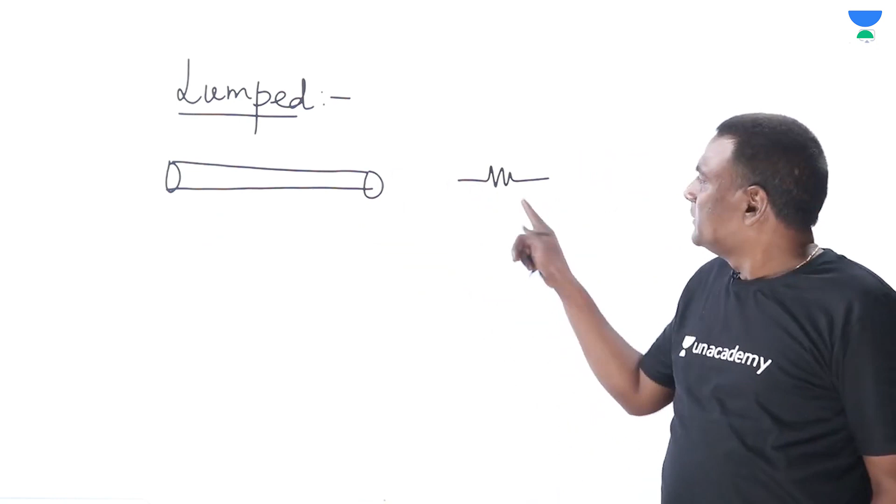That's it. Okay, meaning that maybe if I have one wire here, of 1 meter or whatever it may be, if you convert that wire into resistance, if you model the resistance of the physically existing system into a mathematical model, this length is 1 meter. What is this length? Nothing. It's a model. That's it. This is the lumped parameter model. And when to go to the distributed parameter model also we have to see.

Right. Now, the point here is, what is lumped? When should we go to lumped? Because if the physically existing system gives 2 amperes for 10 volts, my mathematical model also, after using our tools of network theory, should give almost 2 amperes for 10 volts. Right? So, for that purpose, the lumped parameter model. What is the lumped parameter model? Now, let us see here.

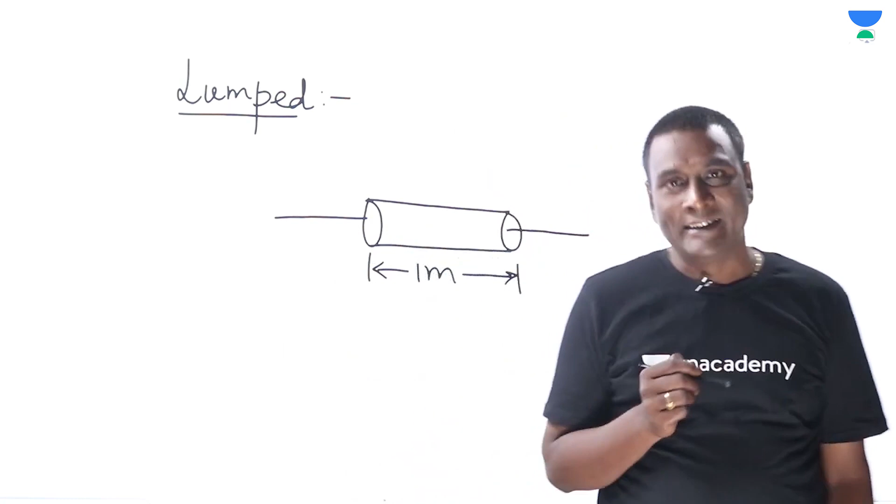If I have one system, or maybe only a wire, and this wire length is 1 meter. Let me assume, you will come to know gradually, because this can be directly connected with the power system. Long line analysis: why in long line analysis do we have to go to the distributed parameter model? Why in short and medium lines in power systems need we not go to that level? You will understand now.

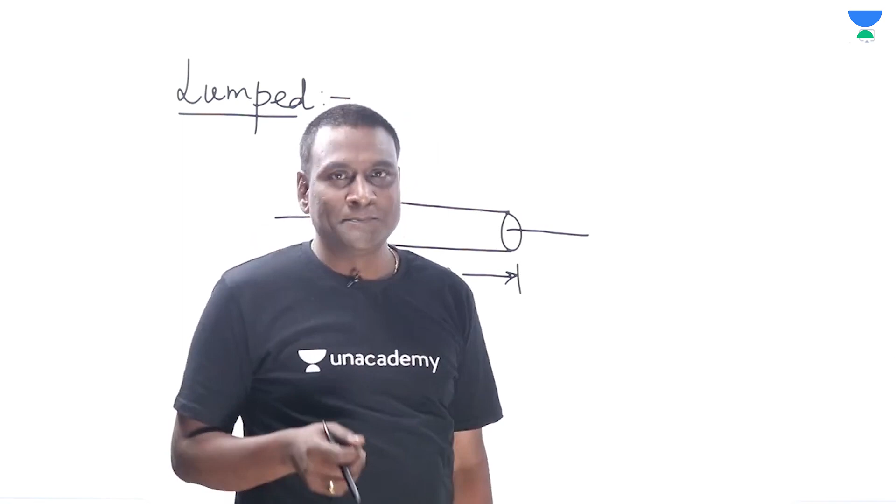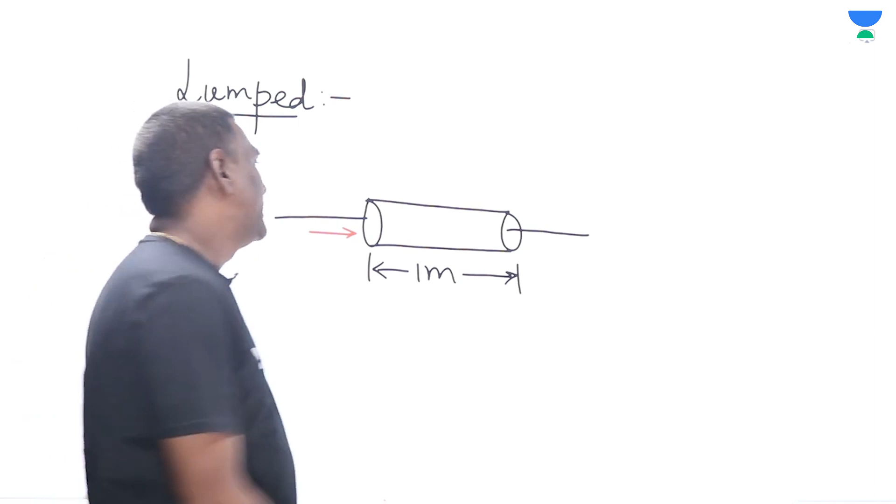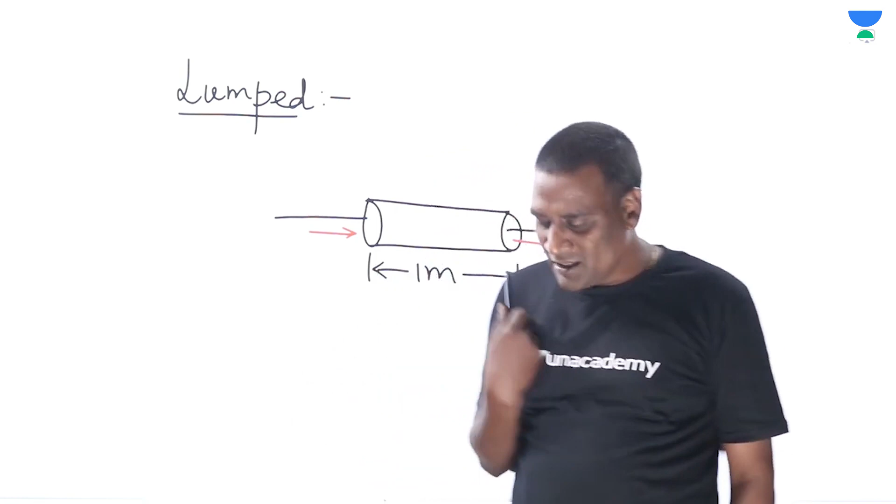Now, if I hit here with some electromagnetic wave, it will come out from here after some time delay. It should be there because, as per the theory of relativity, nothing can go beyond light velocity. Our electromagnetic wave velocity is also light velocity only. Actually, don't focus on the time delay, but rather focus on the information. You will get to know soon. Now, what is the velocity of an electromagnetic wave? This is 3 into 10 to the power of 8 meters per second.

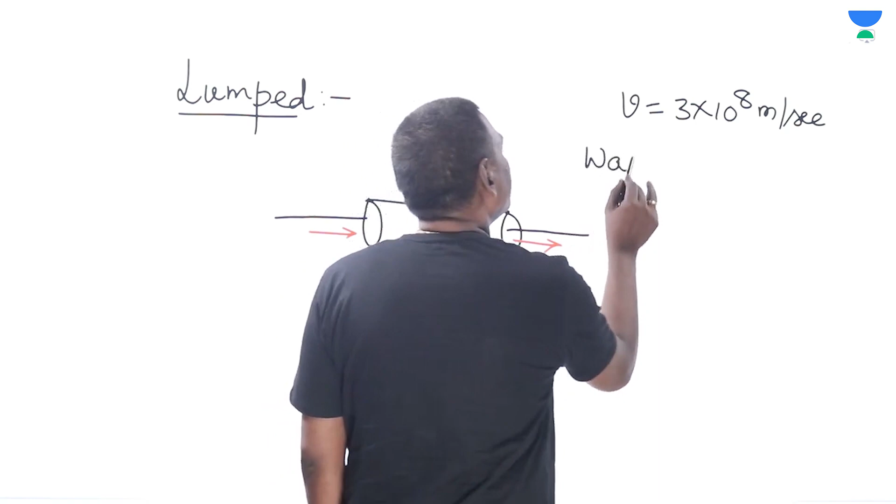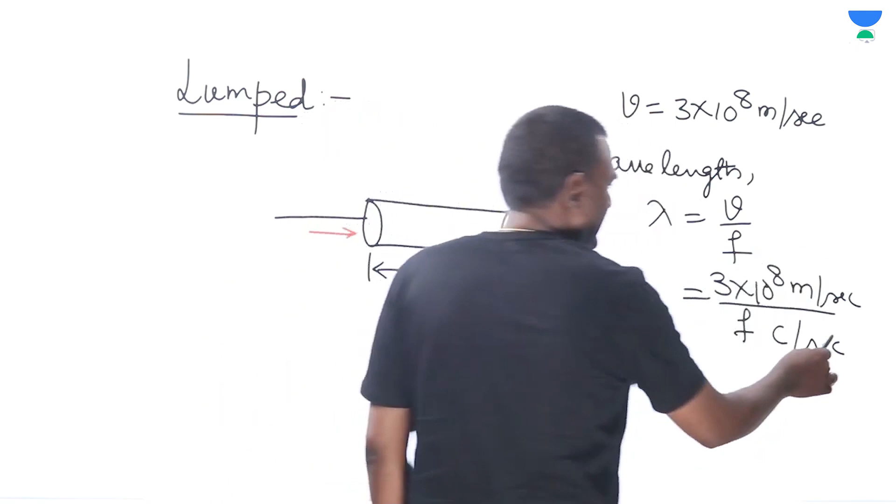Now, let us understand what is wavelength lambda. Wavelength lambda equals V by F. This V is not voltage; this is the velocity of the electromagnetic wave, in meters per second, divided by frequency, in hertz or cycles per second. What are we going to get? Meters per cycle. Try to understand, because we can make many things very easy by trusting dimensions.

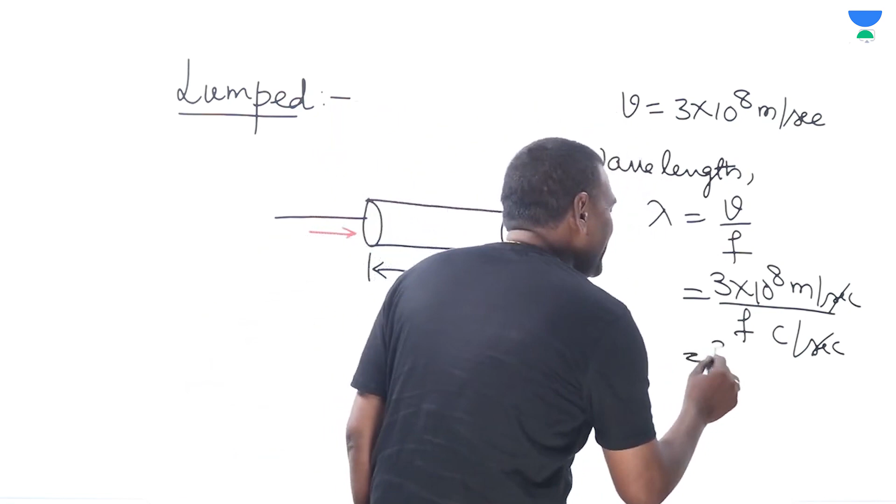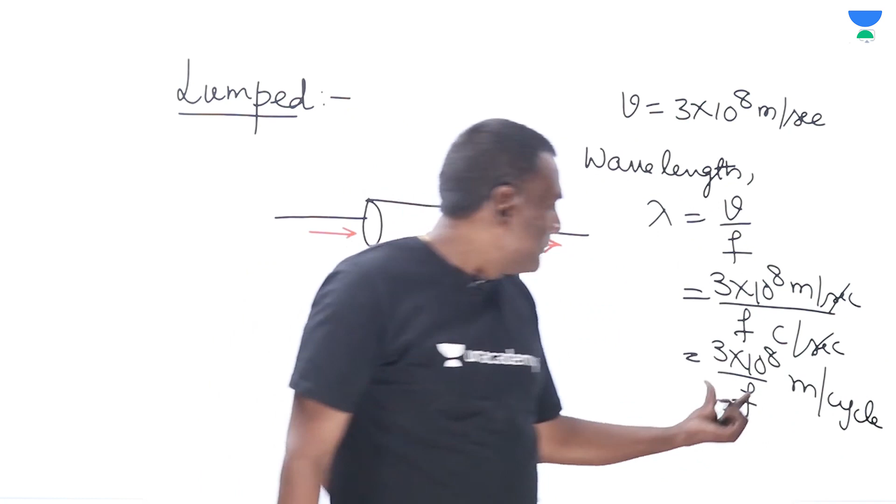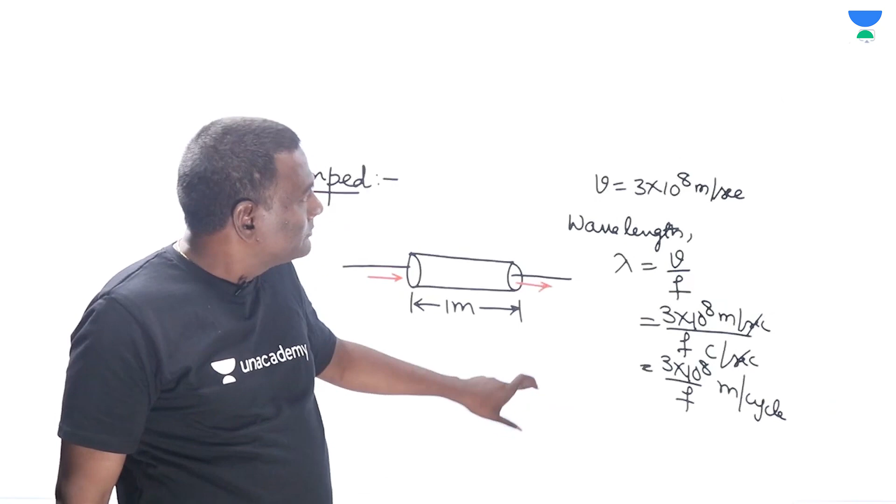So this is going to be 3 into 10 to the power of 8 divided by frequency, so many meters per cycle. Meaning that my wave will travel those many meters per cycle. Now, how many meters per cycle will be decided by frequency. Now, let us think of frequency. Let us consider 3 different cases.

Let me consider the first case: lambda equals 3 into 10 to the power of 8 divided by 3 hertz. Normally I take the same numbers because it is easy to visualize. With a frequency of 3 hertz, 3 cycles per second, this is going to be 1 into 10 to the power of 8 meters per cycle, or 10 to the power of 5 kilometers, 1 lakh kilometers per cycle.

So, if the same electromagnetic wave hits here, in one cycle, you will get the information gradually, our electromagnetic wave will travel 1 lakh kilometers. Now, let us take the second case.

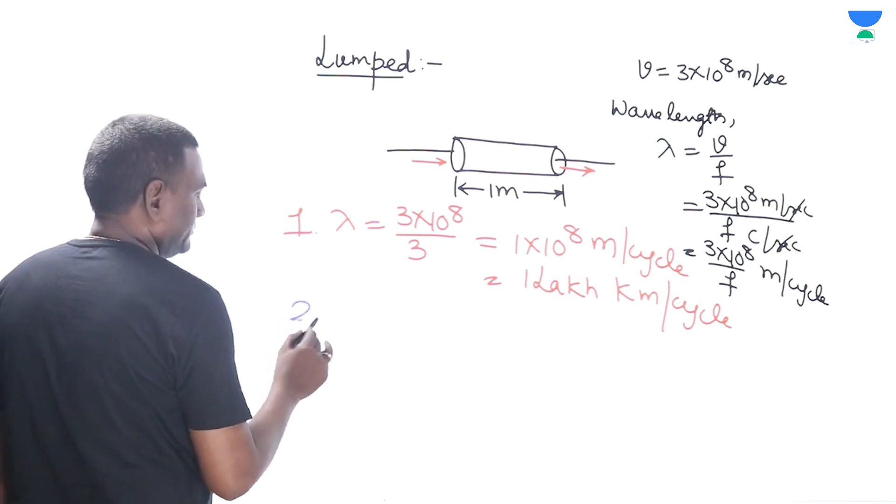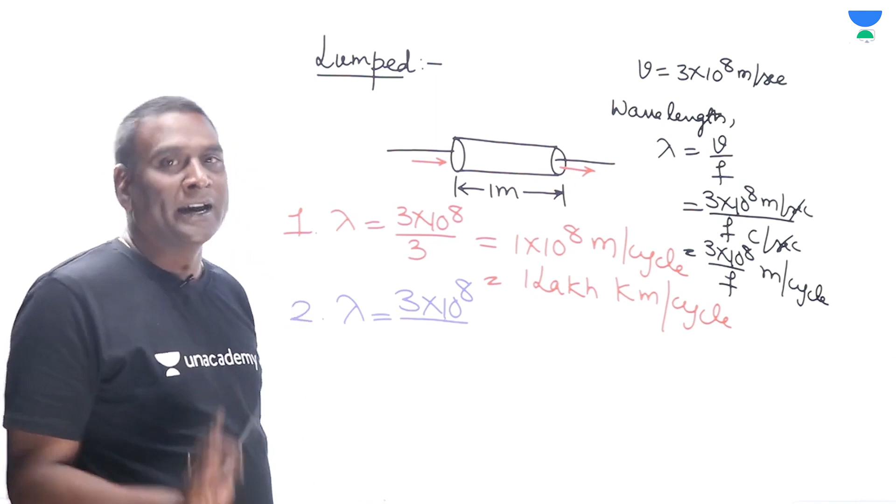Second case, lambda equal to 3 into 10 to the power of 8 divided by... Let us consider frequency is increased to 300 megahertz. So it is going to be 300 megahertz. Second case, then how much would it be? It is going to be 1 meter per cycle.

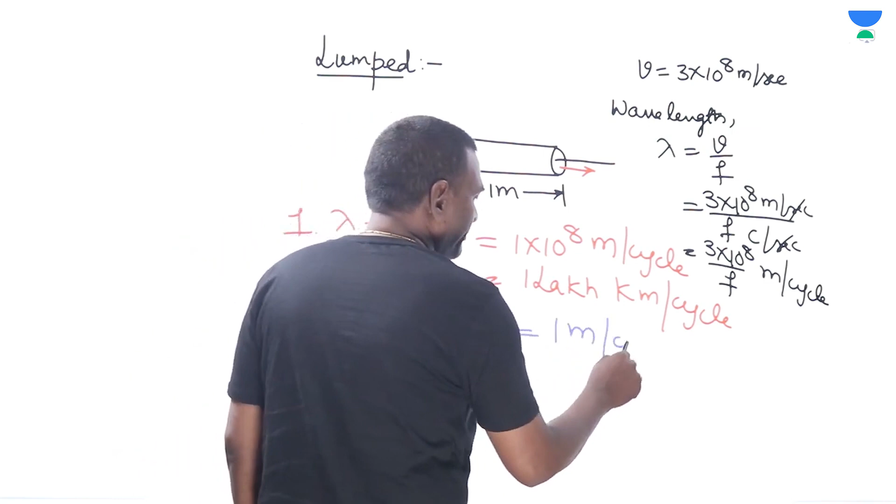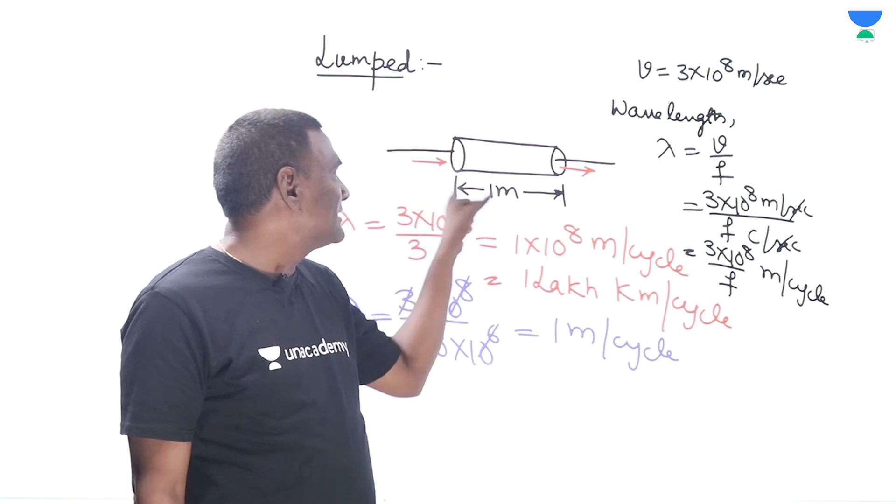Focus here. So, in the first case, if your operating frequency is 3 hertz, then before losing one cycle of information, my wave will travel 1 lakh kilometer. And in the second case, in order for my wave to travel from here to here, it will consume one cycle, because this is 1 meter per cycle. Okay. Now, let us think of another system.

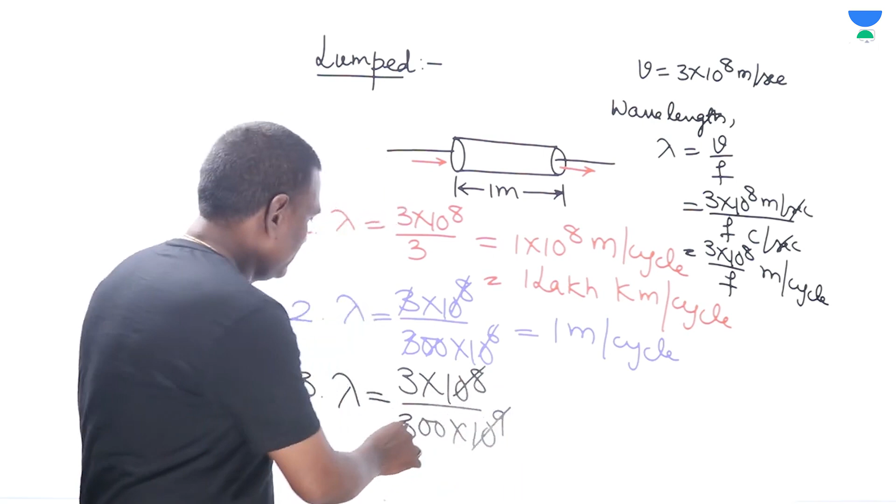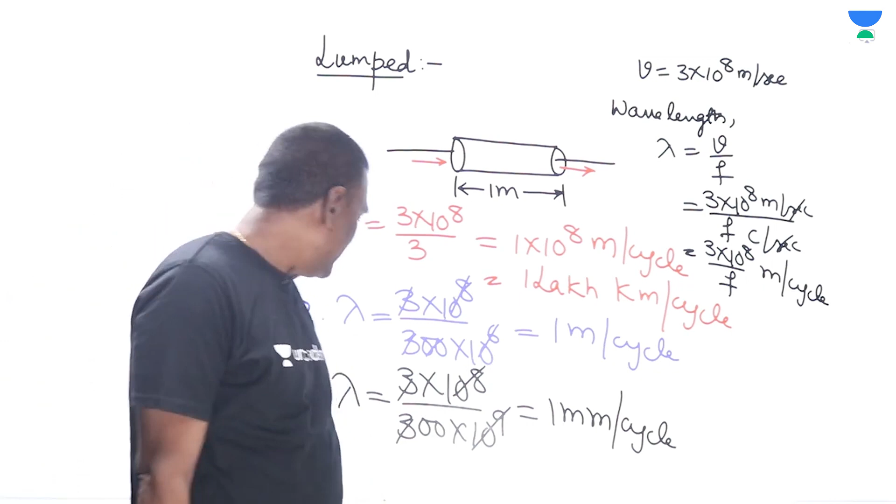Lambda equal to 3 into 10 to the power of 8 divided by maybe 300 gigahertz. Meaning that it is going to be 1 by 1000, 1 millimeter per cycle. Now you will get the clarity. See here, my electromagnetic wave velocity is constant, 3 into 10 to the power of 8, but after starting my electromagnetic wave here, before it reaches here, how many cycles of information are we going to lose? Try to focus there. You will get the idea.

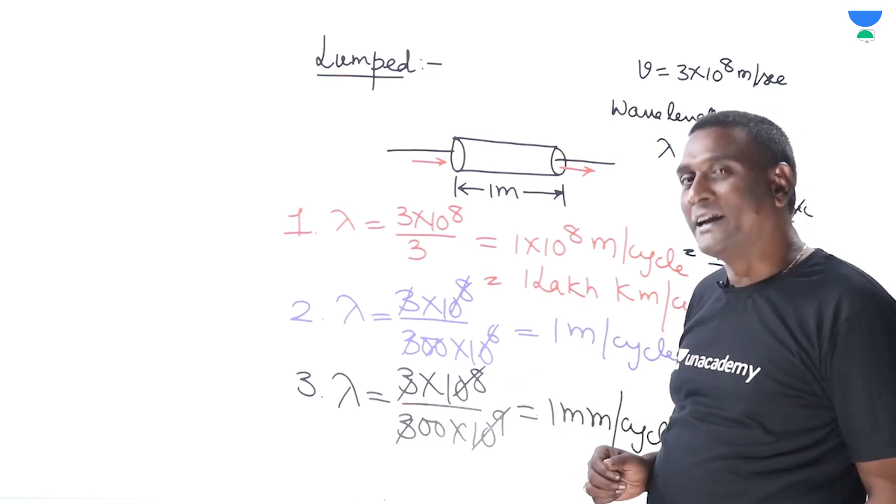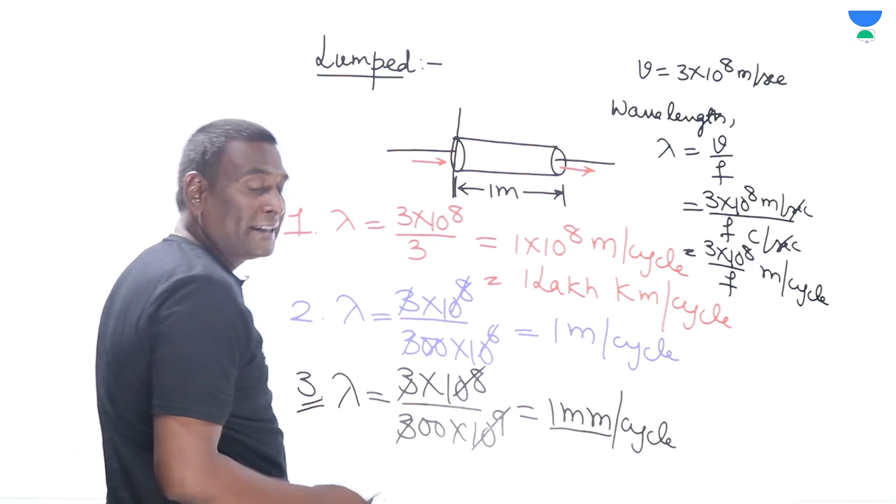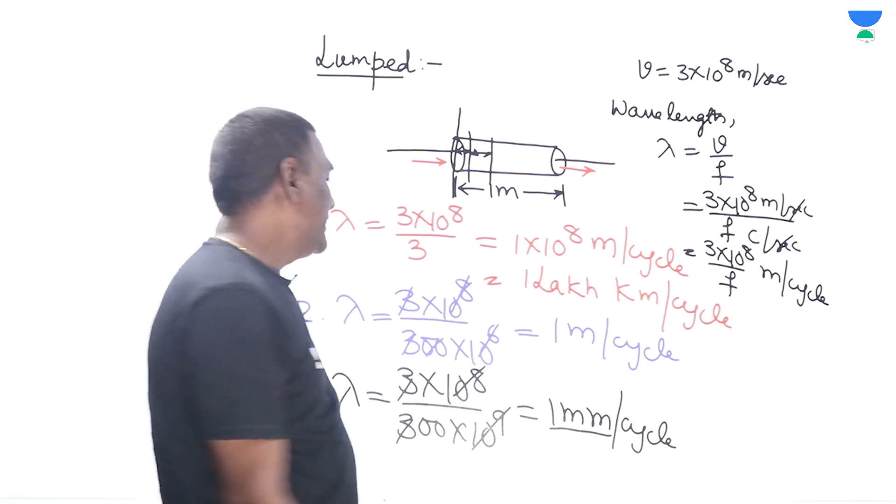Now see here. In this case, 1 millimeter per cycle, meaning that if I hit my electromagnetic wave here, in order to reach 1 millimeter more, it will consume one cycle. After 1 millimeter, it will consume one cycle. Such that in order to get my electromagnetic wave from here to here, 1 meter, it will take 1000 cycles.

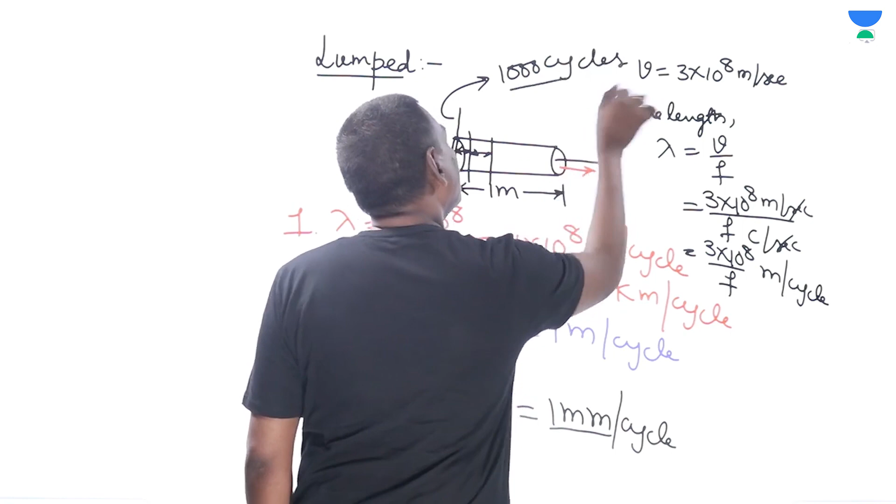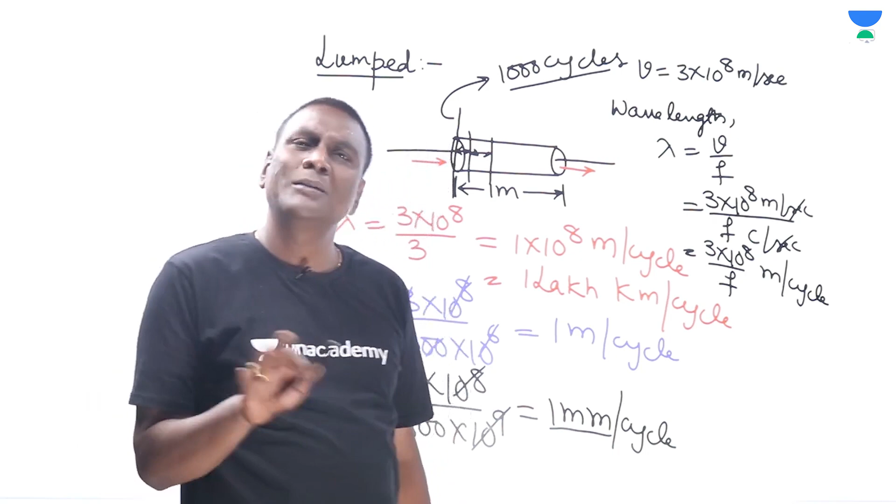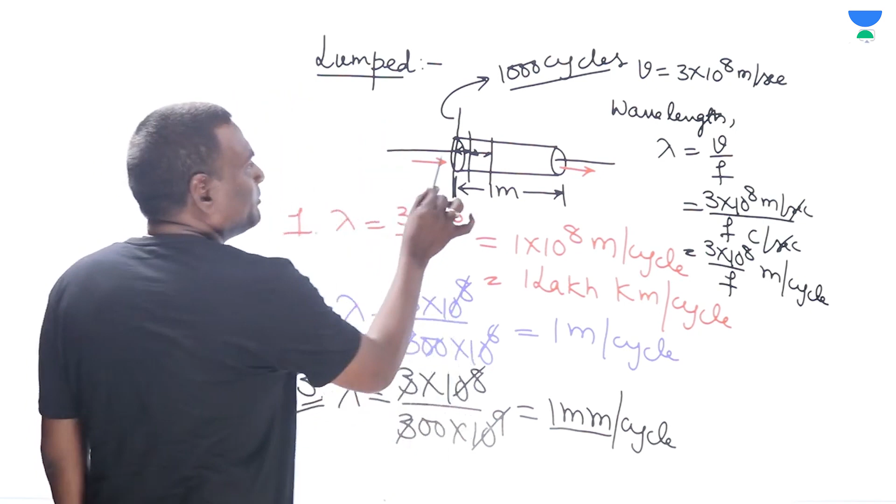Try to understand this properly, because basics are very much important. We have to understand the proper way. At the start, we will learn slowly, not a problem. But once basics are built, our perception levels will increase exponentially. Anyway, for this wave to start from here and to reach here, it will take 1000 cycles.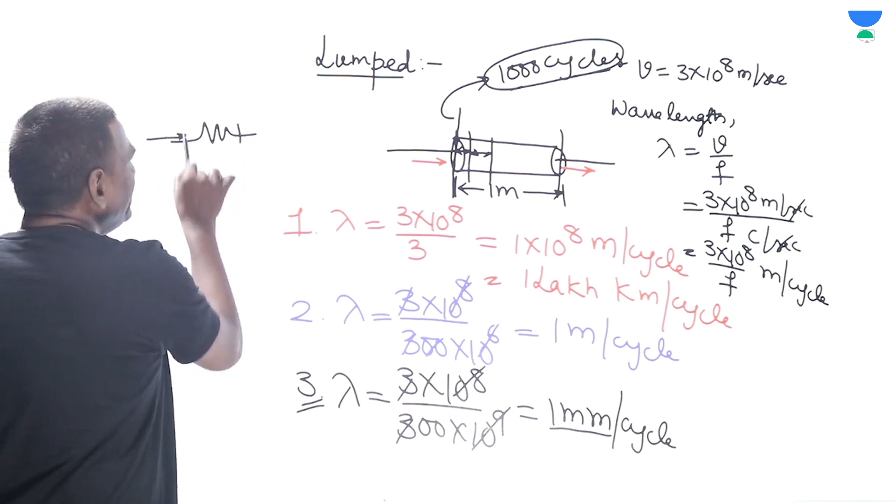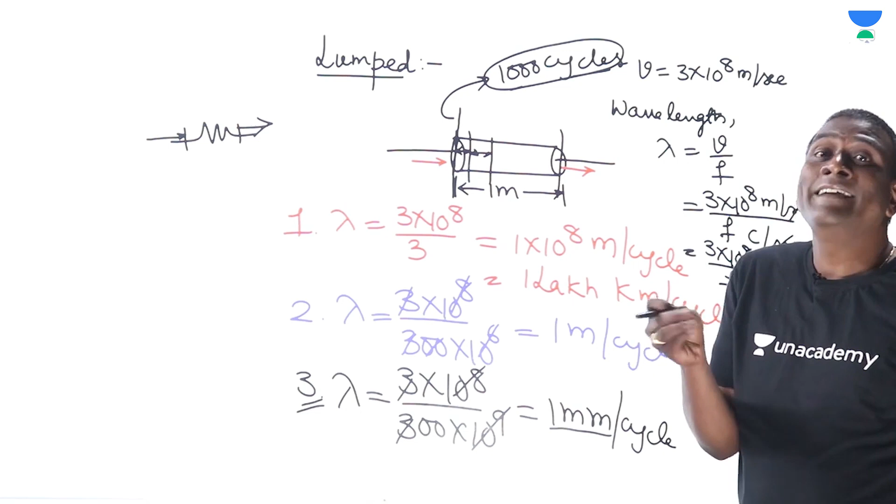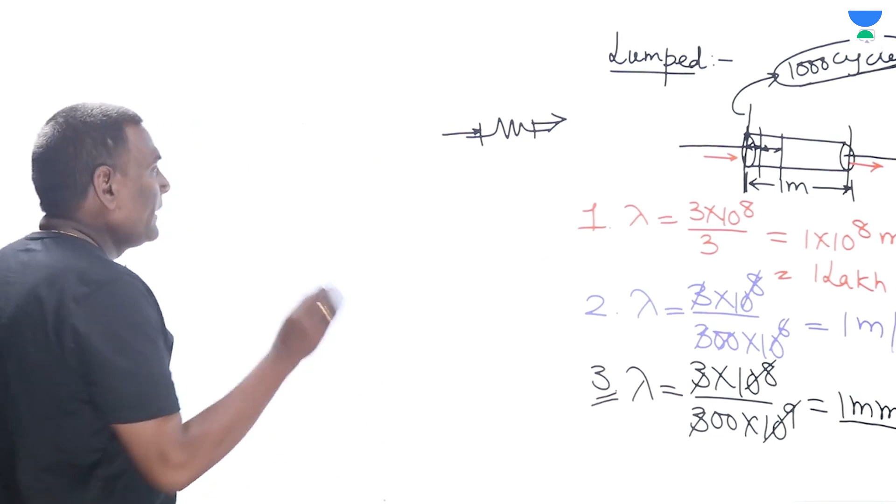Now if I convert this into simple network theory. In network theory, once the electromagnetic wave enters here, it immediately goes here; that is the assumption there. But if you use network theory for this case, what is going to happen? You are going to miss 1000 cycles of information. Okay, forget about it. Let me give you a practical example.

In networks, we don't get the velocity of the electromagnetic wave and all, but in EM theory, traveling waves will be there. In power systems, long lines, traveling waves will be there. But in networks, or short or medium lines of power systems, we don't get velocity or traveling wave concepts. Why? I'll tell you a practical example.

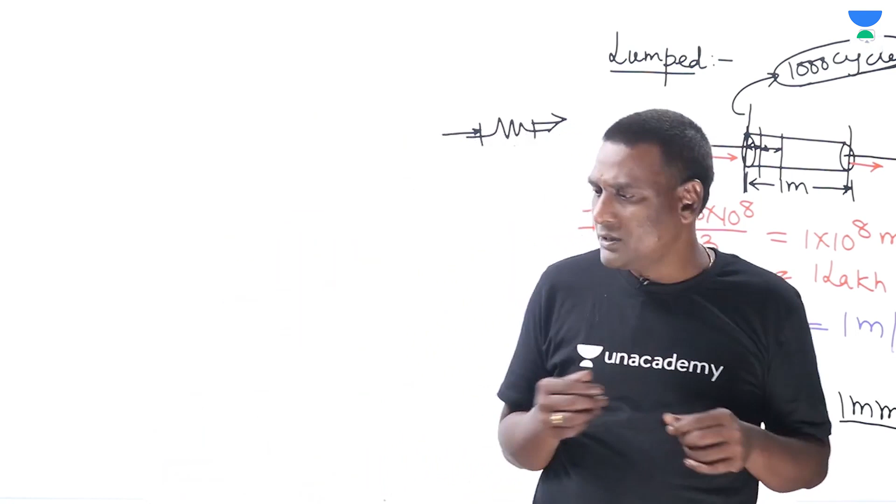Let us think of one incandescent lamp at your home. Somewhere a switch will be there for the incandescent lamp. Now switch on the incandescent lamp. Immediately it will glow, right? That is network theory. But let us think of the traveling wave concept. If you switch on here, switch is here, lamp is here.

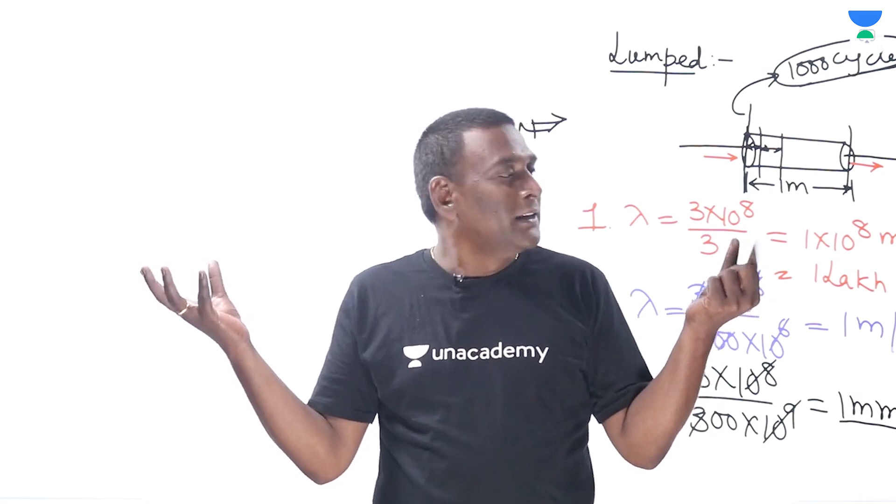If you think of the traveling wave, the electromagnetic wave has to travel from here to here, and then only our bulb will glow. So at our home, the moment you switch on, immediately it will glow. Network theory. And if it takes some time after you switch on, that is wave propagation. Now, the point to be noted here is we have to give an approximate mathematical model which should give an estimated value as near as possible to the practical value of the physically existing system.

Physically existing system maybe for 10 volts 2 amperes. For mathematical model also, for 10 volts almost 2 amperes you are supposed to get, right? Now, coming to the point. See here, in our network theory, velocity of electromagnetic wave is assumed to be infinite. We are not going to assume it as finite.

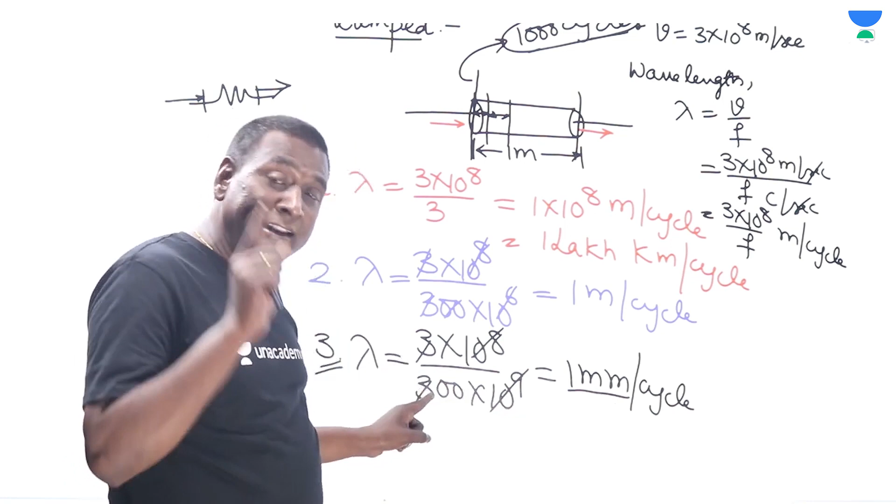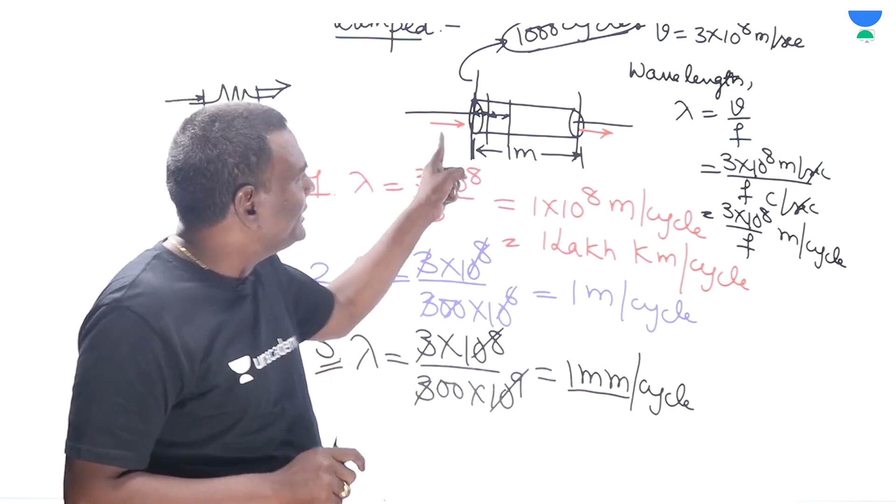For example, see here, in this case, at any cost, you have to go with distributed parameter model. Why? Because if you go directly with network analysis approximation, whatever may be the wave here, instantaneously it should come out here. But if you assume that way, these 1,000 cycles of information you are going to lose. Getting my point, right? So point to be noted is very simple. In order to retain the information of 1,000 cycles, compulsorily you have to restrict yourself to the distributed parameter model.

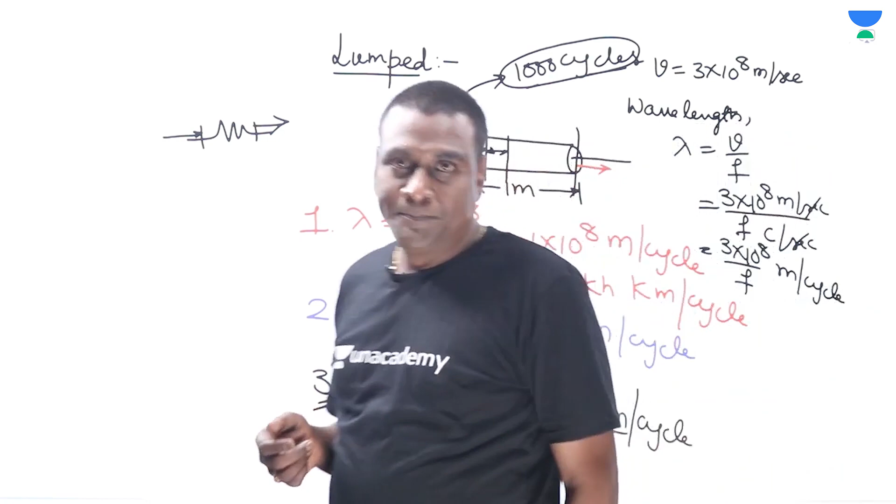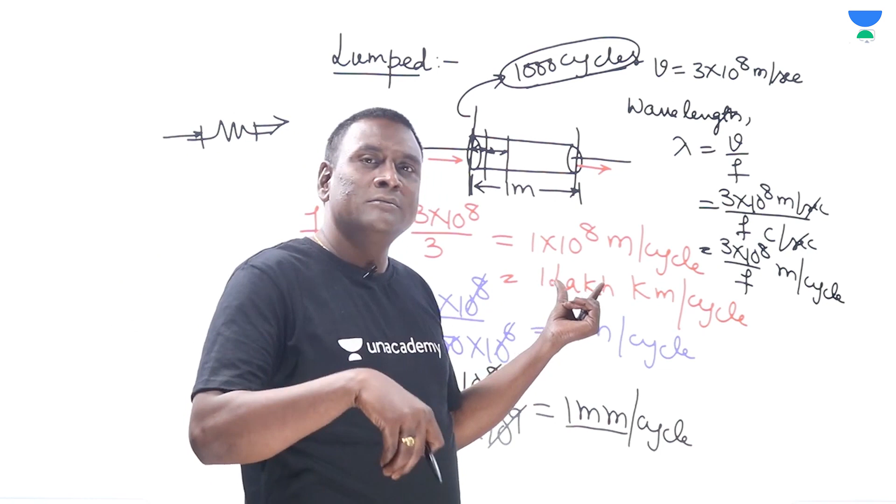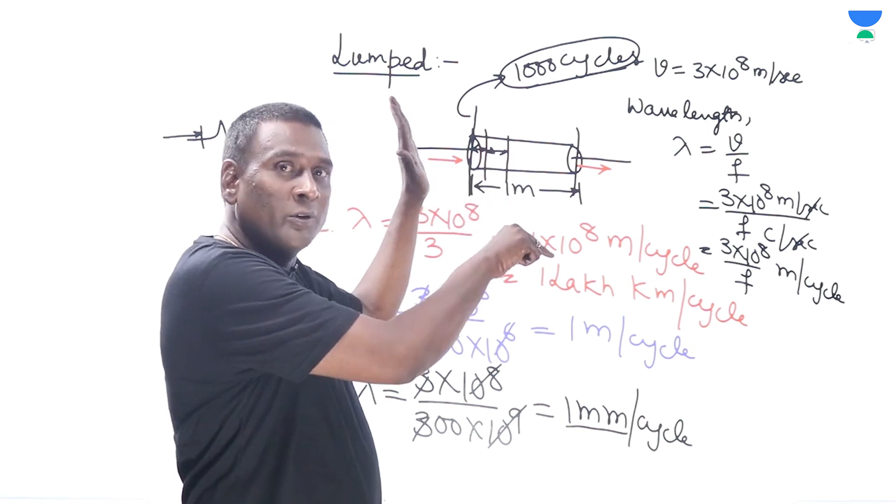Now, coming to here, our power frequency 3 Hz. Then in order to travel electromagnetic wave within 1 meter, how much time or how much percentage of information you are going to lose? See here, within 1 cycle we are going to lose information, right? So within 1 cycle, it is going to travel 1 lakh kilometers. In order to travel 1 meter, how much percentage of information you are going to lose? Almost nothing.

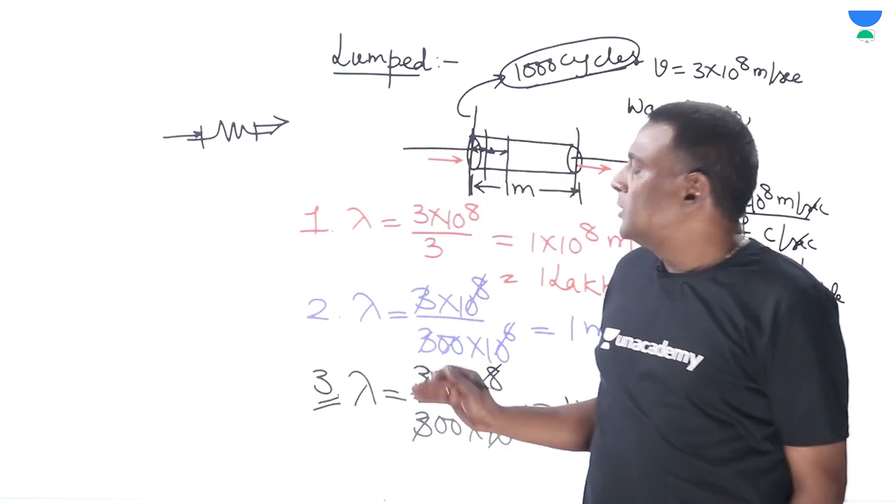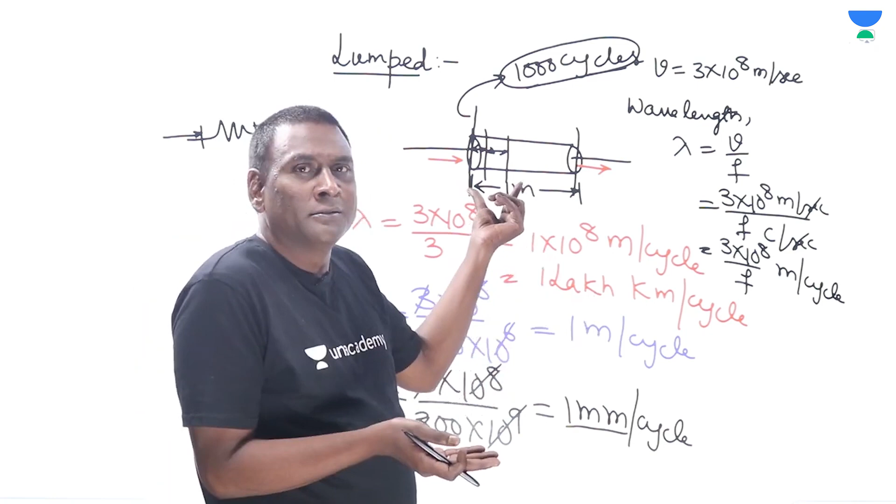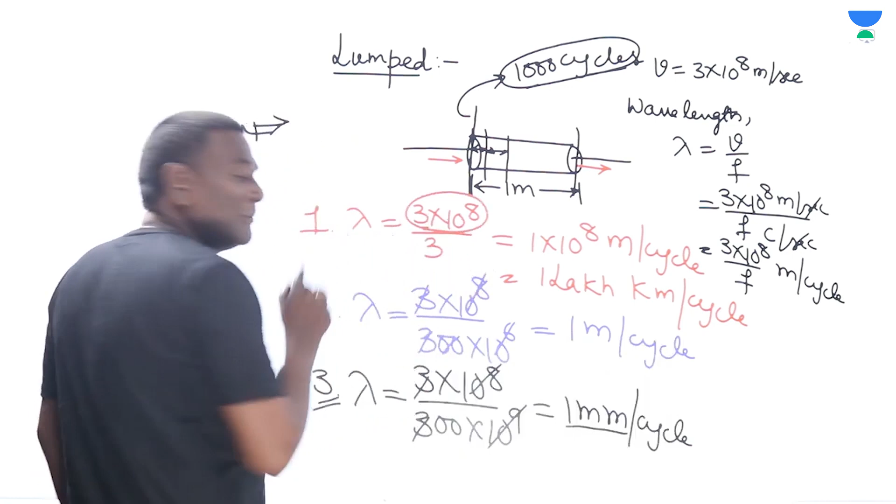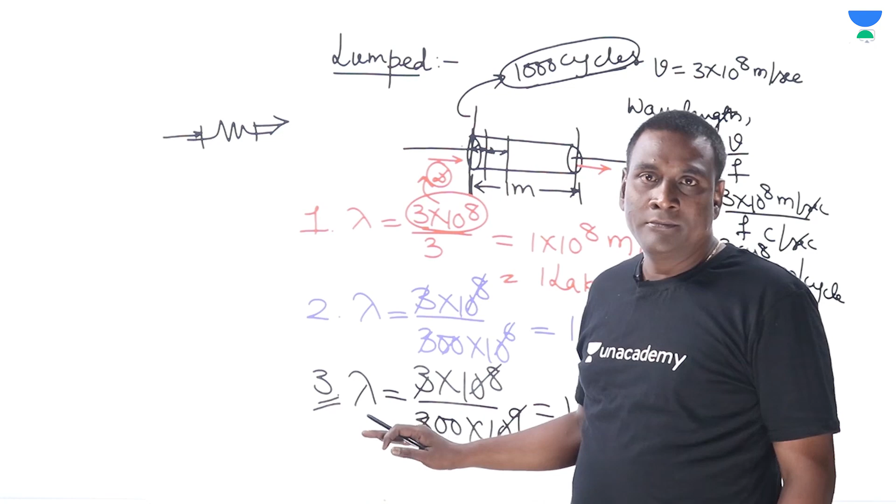So point here is very simple. In this case, go with network theory, because 1 lakh kilometer per cycle, and it has to travel only 1 meter, meaning that you are not going to lose much information, so you can go with network theory. Physically existing system, velocity will be there. But we are neglecting that velocity and making it infinite, such that instantaneously it is going to travel, because for physically existing system or mathematical model, almost same results we are going to get. Now, in this case, at any cost, you have to go with distributed parameter only, because 1,000 cycles of information you cannot lose.

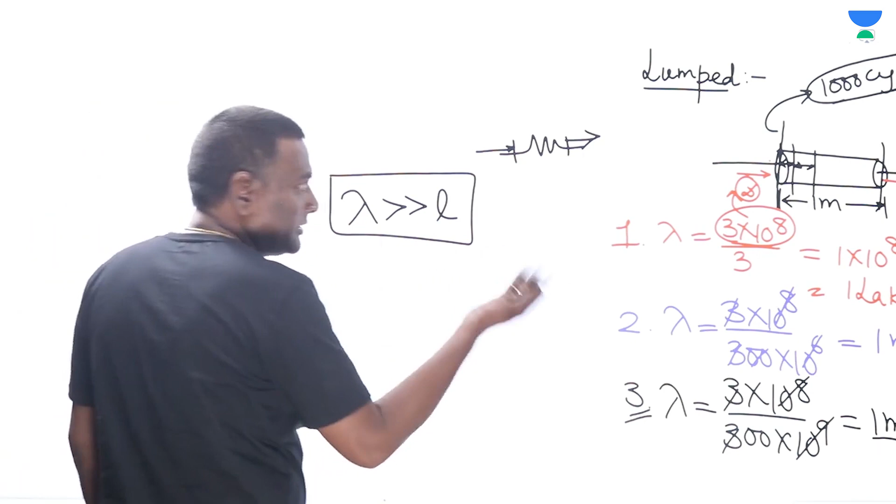Now, you can write one point here. See, lambda, because loss of information, it only will tell. If it is very, very high compared to length of the physically existing system. Here physically existing system, length I consider as 1 meter, and lambda I got 1 lakh kilometer. It is very, very high. So whenever lambda is very, very high compared to length, in the sense maximum side. Length, width, breadth will be there, but whatever is maximum, I am considering it as length.

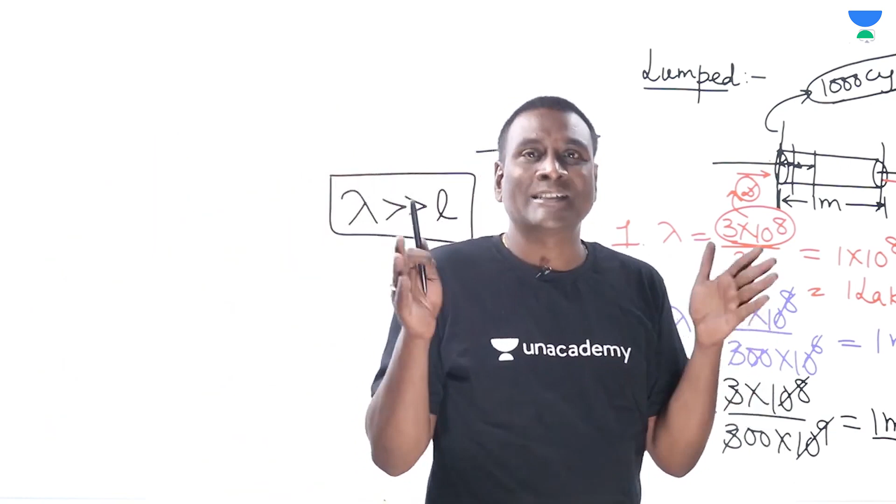If it is very, very less compared to wavelength, then we can assume it with lumped parameter model. And in network, we are going to analyze lumped parameter circuits only. And if lambda and L are comparable, in our long line power systems, when lambda is comparable with L, then you have to go with distributed parameter model. Make a note of this.